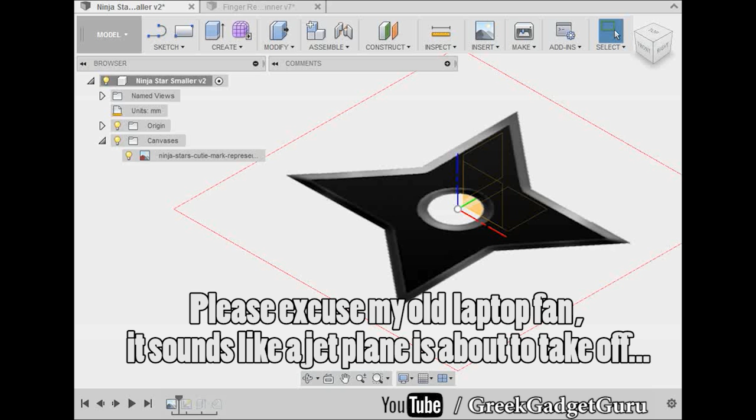First I did a quick Google search and found this canvas here. And then what you want to do is go and right click, calibrate, and let's say you want this opening for the bearing to be smaller. Maybe you have larger bearings, you want to make a larger ninja star.

Then you would take the point across, which would be the diameter, and that would set the rest of the image to scale based off of those 2 points and that measurement. So in this case I had some smaller, and I can actually go in here and see

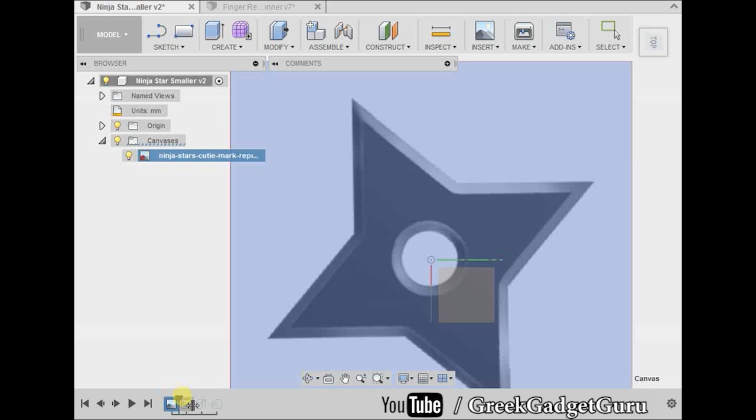over here, step 2. So here's my sketch, and I can go edit sketch. You can see that the diameter is 22.2 millimeters, and then I just basically based everything off of that center point on the origin. So go ahead and stop the sketch.

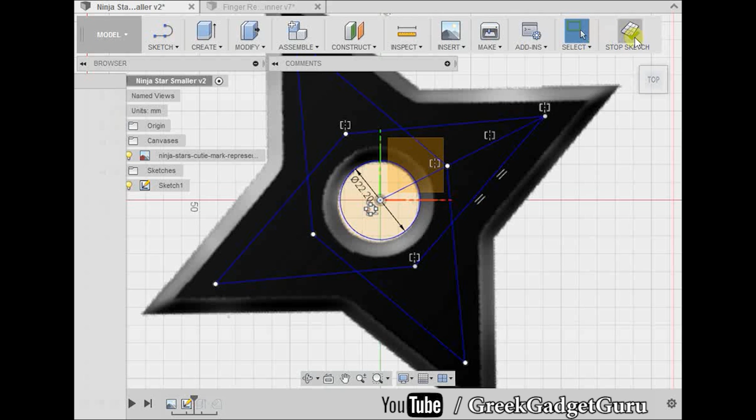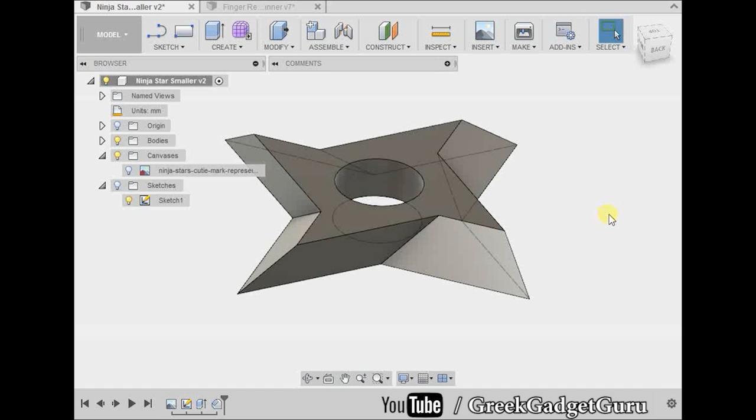The next step was to extrude it, and I'll get rid of the image here, and also the sketch isn't really necessary now that we have our form, and that's the basic shape. The next thing to do is select your edges that you want to chamfer, and there you can see, very simple. And if you want to get the origin out of there, that's pretty simple.

The next piece is the finger rest, which may be a little bit more challenging. I had to go through a bunch of different times to make the right measurements. So I started out with the circle in the center, and then basically extruded that, extruded the

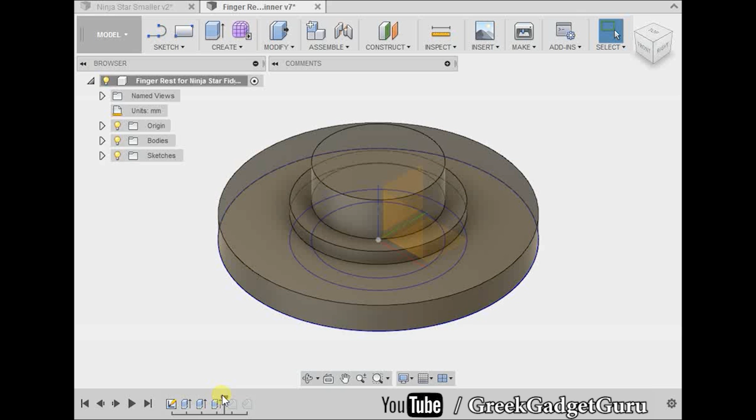little cylinder that goes inside of the bearing, made a little resting plate so that the metal interior piece that spins on the rest of the bearing can sort of rest right here. Then chamfered that, and one more time around the edge, and that's the finished product.

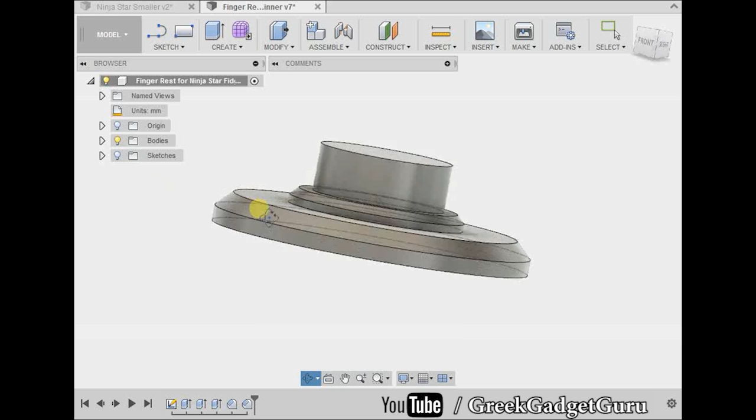So you can see I just printed those. Very simple design. What do you guys think about that? It's a pretty straightforward process, and once you learn this sort of skill in any modeling software, then you can apply this to a lot of your projects.

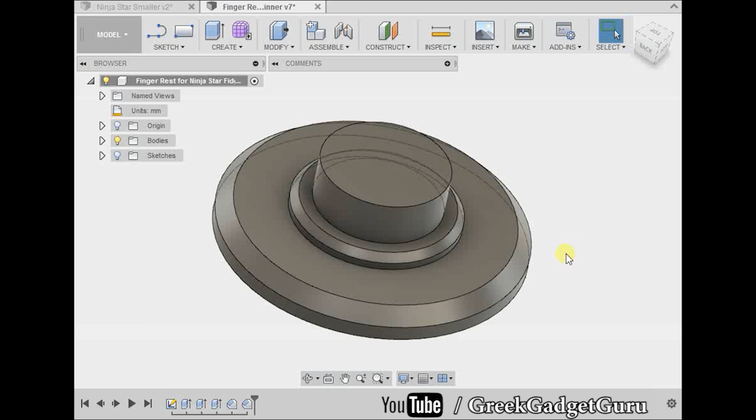The idea is to go back to some of my older projects and apply this new knowledge of 3D printing to them. So I have some ideas for multi-tool, a little multi-tool rocket launcher I made. That was really fun. And also I could do some stuff with lighter cases, maybe my own custom lighter case. There's already some out there, but it'd be neat to create something completely original using these technologies.

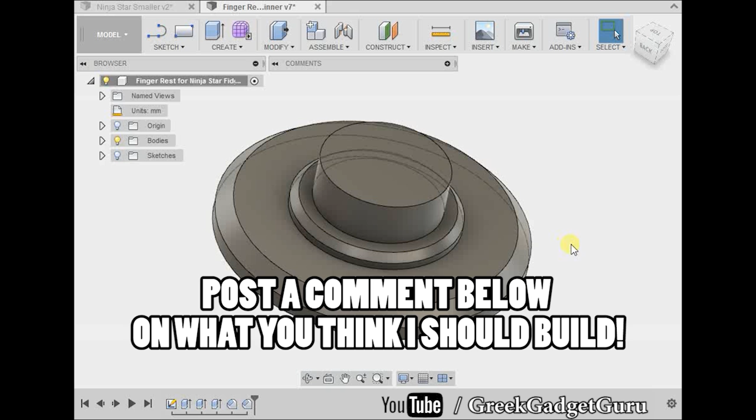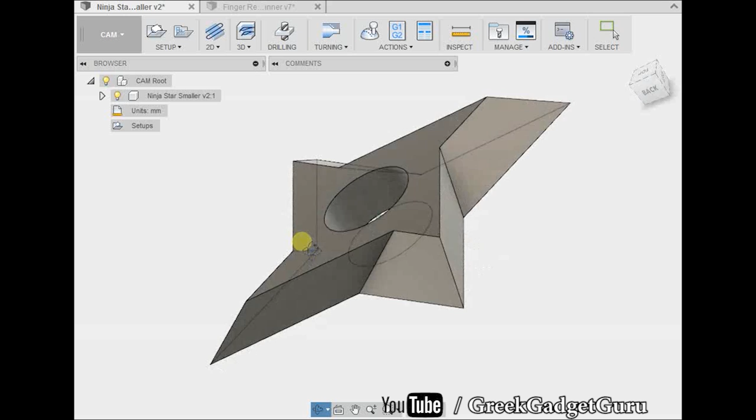And you can also go in and use CAM software, if you didn't want this to be 3D printed because maybe you're dealing with more intense pieces that need to hold up to more force. For example, this could be milled and we'd have a very awesome and useful shuriken. Not sure how useful the bearing would be in the center, but you probably get what I'm talking about. Gives us more options.

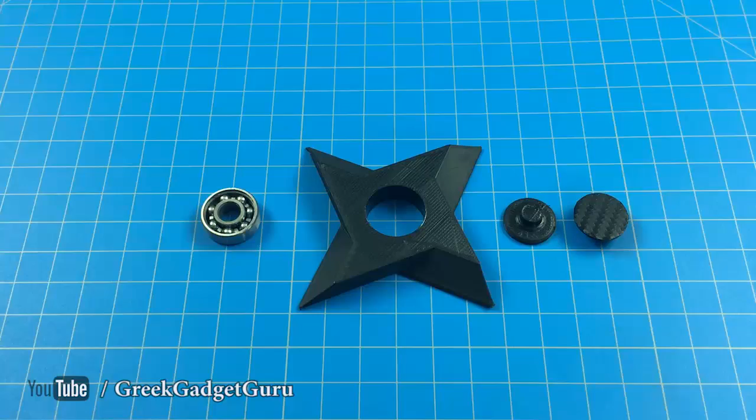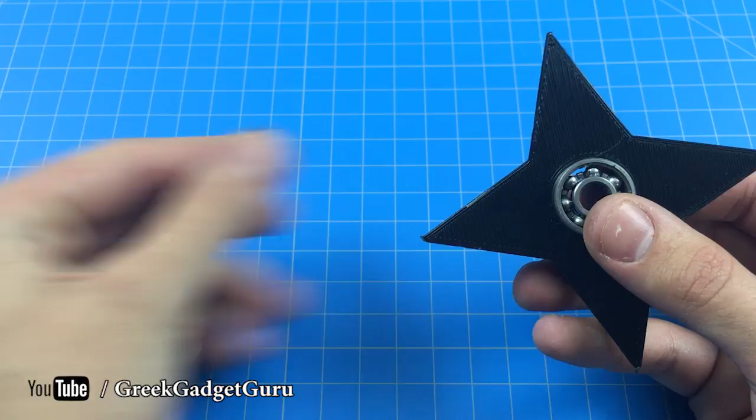So here we have the model disassembled. Essentially there is a bearing which goes in the center, and everything's just friction fit together, so you have to sort of just push that in. And I actually removed the caps on both sides of the bearing and lubricated it myself with this stuff called Speed Cream. It's for skateboards, so that stuff's pretty good.

And you could actually, if you think it looks cool like that, you don't necessarily need the little plates. But these are your thumb rests, and these also friction fit. And just kind of play around till you get it where you want it to be in the center.

And then I took some of this carbon fiber vinyl, and I think it adds a nice aesthetic look, much more professional and finished. And there you go. So the most fun is to try and get this thing to spin ridiculously fast and kind of see some interesting patterns the way that the camera picks it up.

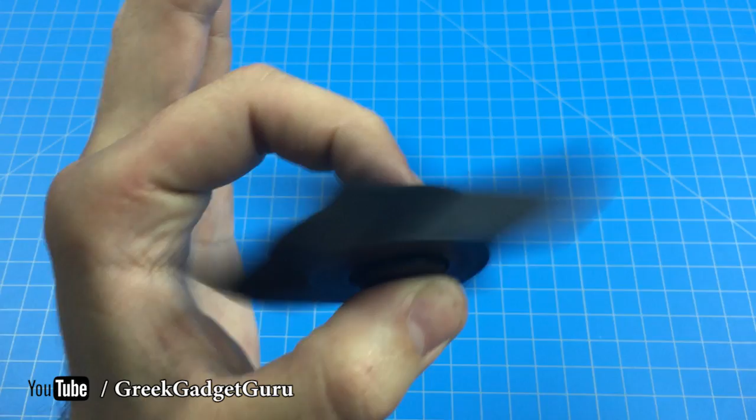And the way that this is made, you can actually catch the wind if you were to blow on it. Still not fast enough. Compressed air.

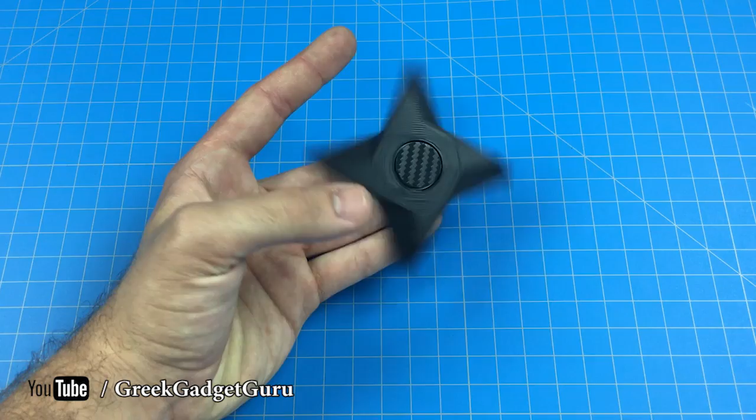So there you have it, a really simple and awesome fidget toy. I like this design a lot because I think it's pretty original, the Ninja Star. And I know that there's a lot of different fidget toys out there, and the hand spinner, I obviously didn't come up with the idea originally, but I do like this design in general.

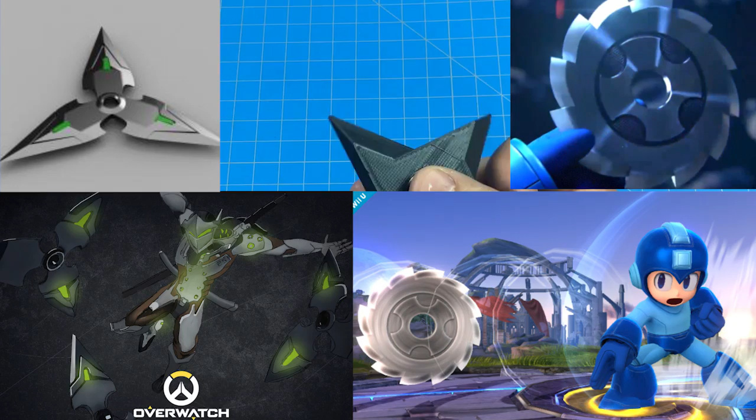And I was thinking about applying it to some other more prominent, famous Ninja Stars, such as the Genji Shuriken from Overwatch, or maybe the throwing Metal Blade from Mega Man and Super Smash Bros. And I thought that would be pretty cool. So I can pretty much apply this to anything that I want.